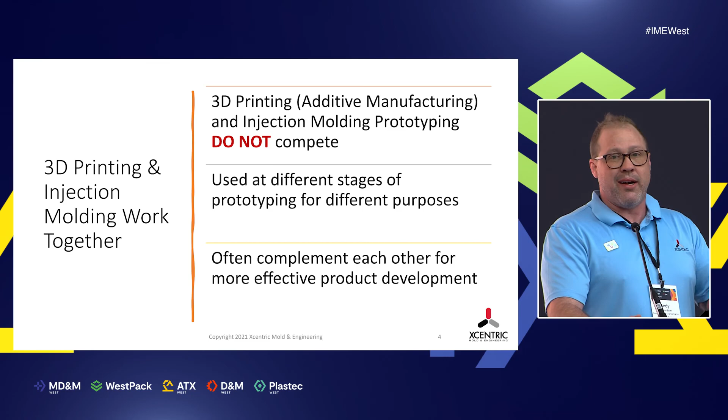So additive manufacturing, or 3D printing, as it's oftentimes called, and injection molding are not competitive technologies. They both serve the prototyping element of your product development cycle very effectively and complement each other quite well. They're definitely used at different stages of the process, though, so we're going to dig in a little bit more on that and take a look at how they complement each other really well.

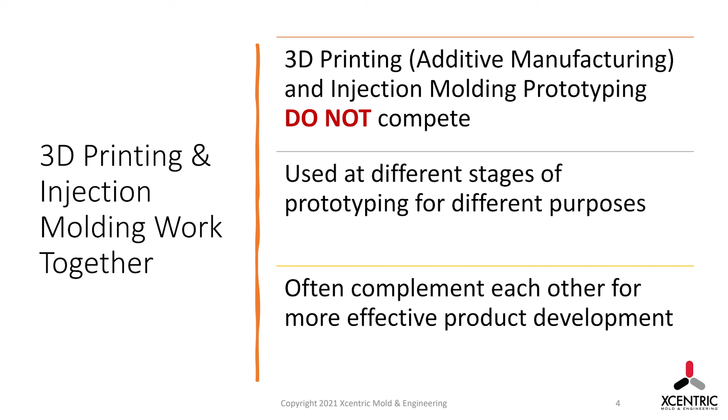So to start with, some of the advantages and disadvantages of each type of technology. So 3D printing, or additive manufacturing, is great for quick iterations. You can have a part built in as fast as a day, get it to you in 2 days, and you can do a lot of iterative design process to really iron out what you want your fit and form to look like for that specific part.

You have relatively low upfront costs. You don't have any capital equipment or assets that you have to purchase like you do with injection molding. There's not a tool there. You can basically just submit a CAD design, print it really quickly, get part in hand in a couple of days. So they're great for fit, form, and even some functional testing, but there are some limitations there that we'll talk about in a minute.

With additive manufacturing, it's great if you have very complex designs that don't really have a way to be manufactured using traditional technologies such as injection molding or CNC machining. So even for production environments, if you have really complex designs, there is an opportunity to be able to use 3D printing for that as well.

Some of the challenges with 3D printing is it's typically a lower fidelity manufacturing process than what you see with injection molding or CNC machining. There are a tremendous number of materials that are available now from a lot of different vendors, but there are still some limitations in terms of the materials that you're going to get and the functionality of those materials. They're not necessarily going to replicate specifically what you're going to see with a traditional thermoplastic like you would see with injection molding.

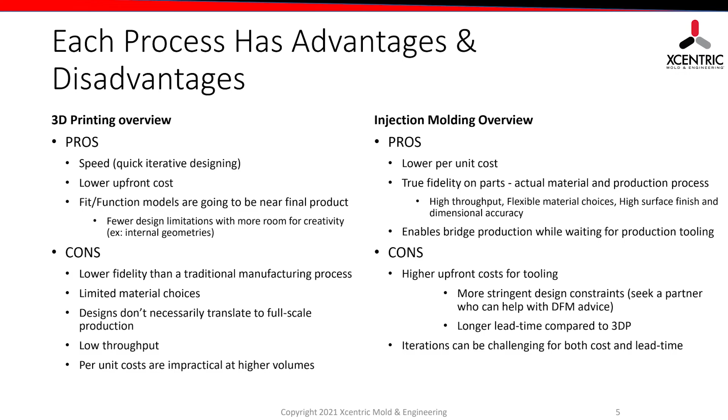There are obviously some cons to using aluminum tools for prototyping. You do have the cost of making the tool, whereas with an additive manufactured part, you can print it and have the part in a day for a couple hundred dollars, but with a tool, obviously, it's going to be a little bit more expensive on the front end. So you do have to keep that in mind as you're going through the design process. And we're going to talk about how these two technologies can marry together to serve everything that you need in the product development cycle to make it as cost effective and as efficient as possible.

One of the things I do want to caution you about with injection molding specifically is that before you get to a place of making a tool, make sure that you're partnering with somebody that can actually provide you with design for manufacturability feedback on your design before you start cutting steel or aluminum. It's really important that you start early in the process, so you're having those conversations even before you're prototyping, so you know exactly what to expect in a manufacturing environment.

Because what happens is with a tool, especially if you have a design where you need to remove plastic, it can end up being really costly and time consuming because you either have to recut the tool or weld it up and recut those specific features. So just make sure that you're working with somebody that's going to be able to support you through the entire product development cycle on the front end.

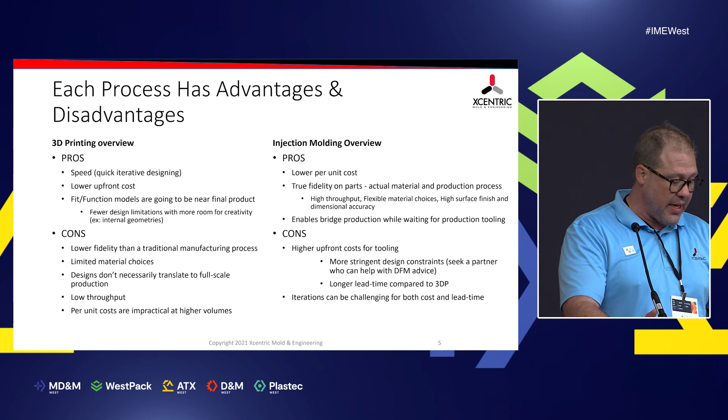So taking a closer look at 3D printing specifically, usually this is going to be used for evaluating the feasibility of the design that you're working on, looking at the appearance or the feel of the actual CAD data that you've been working on. So again, great for fit and form, some functional testing. It's not going to give you the actual in-use material that you're going to use in production. So typically, the material properties shouldn't be a high priority at this stage unless you have some very specific testing that you need to do, which is when you'd want to consider other technologies to produce the parts.

Typically, again, volumes are always a consideration with additive manufacturing. From a cost per unit perspective, the more parts that you need to build, there's usually a transition point where it makes a lot more sense to go with a traditional manufacturing technology such as injection molding versus doing prints, just because the average unit cost is going to be a lot higher.

There are a tremendous number of printers that are available, both commercial and industrial. As you walk around the show, I'm sure you've seen plenty of the printers that are out on the floor out here. Relatively low-cost printers are available. There are some challenges that we'll talk about in a second with building the additive manufactured parts yourself that you have to keep in mind.

And another often used element for 3D printing that I mentioned earlier as well is if you have a design that just can't be manufactured in any other way, or if you have custom manufactured parts that are individual on a case-by-case basis. So a good example would be hearing aids.

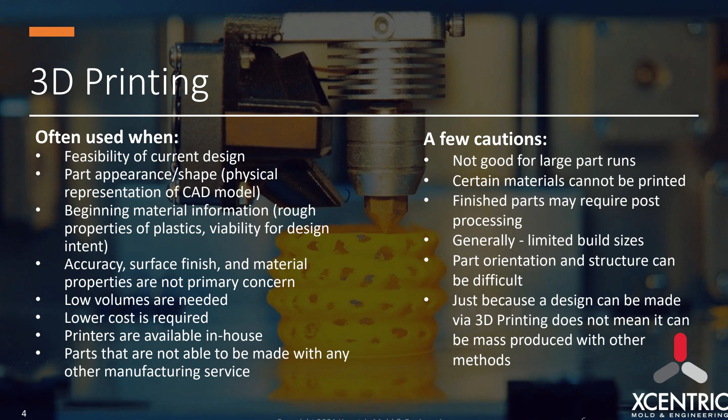So hearing aids are typically going to be molded to an individual's ear. So you're not going to make a tool and have a standard size shape that you're using for hearing aids, or even dental applications such as Invisalign. I know they use stereolithography for all of their molds that they're using to create the thermoform parts. So that's a great example where 3D printing can actually be used in a production environment and create a lot of value for a customer, because you don't have to build traditionally manufactured tools or parts for those custom applications.

There are some things to be considered that you want to be cautious of when you are using 3D printing, though. Again, it's not great for large part runs. If you're making 500 or something, there are a lot more cost-effective options that you have available to you.

There are certain materials that can't be printed. Again, hundreds of materials on the market are available across dozens of different technologies, but they're not going to be the exact same thermoplastics that you're going to get in an injection molding application. So you can get something that's ABS-like or nylon, or even some nylon-based materials in powder bed technologies, but it's not going to function or act the same as molding a nylon part as you would in an injection mold. So it's a lot different, and you have to be considerate of that.

Generally, you are limited to build sizes. There are some industrial printers that have really, really large platforms, so you can make a part that's a couple of feet long or a few feet long, but generally speaking, you are still limited to that platform size. So if you need to make 5 of that really, really large part, you're going to be running that build 5 times, and it's going to get very expensive.

And additionally, when you're using additive manufacturing in your product development cycle, again, just because it can be printed doesn't mean that it can be manufactured with a traditional process. So make sure that you guys are partnering with somebody that can help you with that design for manufacturability feedback early on in the process before you start prototyping, and you're going to have a much better chance for success with that.

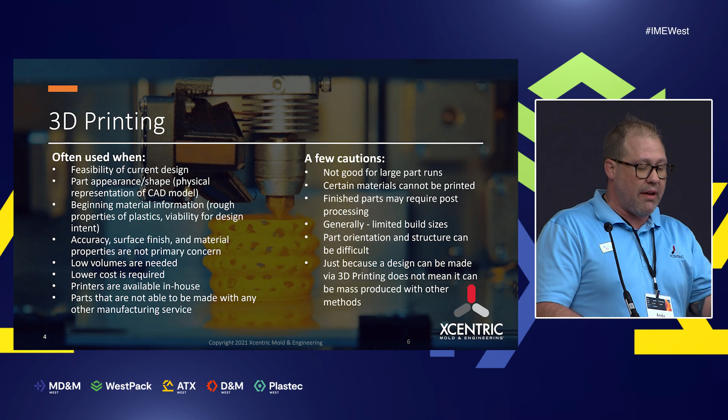So I mentioned that there were dozens of different technologies out here. Today we're just going to take a closer look at 2 of probably the most common technologies, which is FDM and SLA, or fused deposition modeling and stereolithography apparatus. So FDMs are typically quick and dirty prints. They're very easy. There are dozens of printers out there that you could probably buy for a couple thousand dollars that would allow you to use this technology and print on your desktop at home out of an actual thermoplastic.

So the way that I like to describe the process itself is you basically have an extrusion nozzle that's laying down a thin filament of this material over and over, line by line, layer by layer. So if you could imagine looking at a spool of fishing line, that's kind of what the part's going to look like when you get done.

So as you can imagine, there are some limitations with this process. If you imagine creating a snap feature that's in the vertical direction of the build and you try to apply stress to that, it's likely going to delaminate, so it's not going to function exactly the way that you need it to. So there are some cautions here, and you want to make sure that you're working with somebody that has the experience to make sure your part's built and oriented in the machine to print it appropriately.

The process itself for FDM is typically a lot faster than SLA. Not necessarily the build itself, but with SLA, you have a lot of post-processing that you have to do. You have to wash the parts, clear the supports, and cure the parts again. And then there's additional finishing if you want a nice clean surface finish on it as well. So typically with FDM, you build the part, break away or wash off the supports, and you have your finished part. With stereolithography, even though it does require some additional finishing after the part's done, you can get really good dimensional accuracy and surface quality in the part.

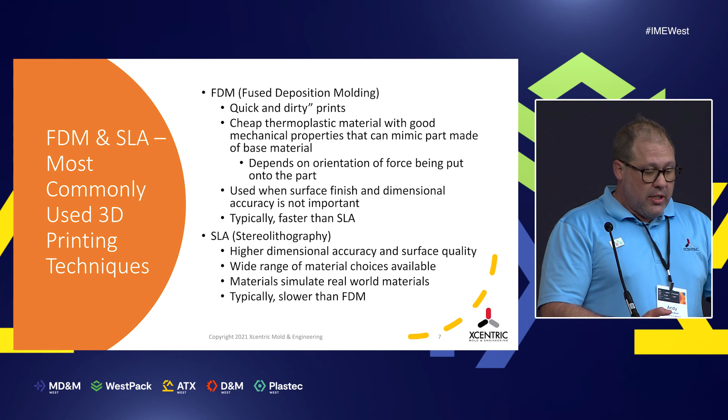So with injection molding specifically, often what we're doing with this technology is we're going to be using this for more complex parts. There's a lot of opportunity here for insert molding and overmolding, which there are some technologies you can use for 3D printing to simulate those, but it doesn't give you the same real world applications that you get when you're actually molding these features in or doing a true second shot molding process.

If your parts need high dimensional accuracy, or if you have specific testing that you need to do on the material or drop testing or anything like that, typically you're going to look at using an aluminum tool to do prototypes out of the end material that you're going to be using, because that's really the only way that you're going to actually get an in-use part to be able to do those tests.

Or if you're just doing some evaluation of what the part's going to look like, you want to look at shrink and warp and splay or aesthetics, like what the part's going to look like when it comes out of the mold. You obviously have to go with a process that's going to be very similar to what you're going to be using in a production environment.

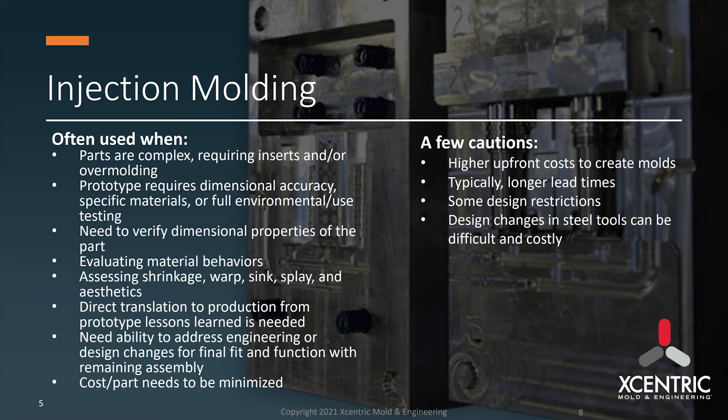Or if you know that you have to run a large number of samples of the part for whatever application. So if you need 500 parts, typically making an aluminum tool for your prototype is going to be a lot less expensive than printing 500 parts, even if you don't need to do any of the testing that we talked about before. But with that, there are some cautions that you need to keep in mind.

So obviously, you're going to have much higher upfront costs because you have to cut the tool before you can start running parts. Typically, it's a little bit longer than rapid prototyping. With rapid prototyping, obviously, you can get parts in a day or 2 days. Tooling, the fastest tools that we typically do are about 5 business days. So it's not a tremendously long time, but you do have to make sure you're taking that into consideration in your product development cycle.

And there are obviously some design restrictions that you have here. So you have to have draft on all your features. There are certain undercuts that you can't accomplish in an injection mold tool or become very cost prohibitive, if you're talking about having to use hydraulics for certain cores or unscrewing cores and that sort of thing. So certainly things that you want to keep in mind as you're going through the design process.

And also, if you get into a tool and you have to make changes to the design, it can be expensive. As I mentioned earlier, if you're taking plastic away, there's not going to be a steel safe change. So you're going to have to add metal back to the tool, which either requires welding or recutting a new tool depending on the specific design changes that you're making. So that's going to add a lot of time and cost to your process up front.

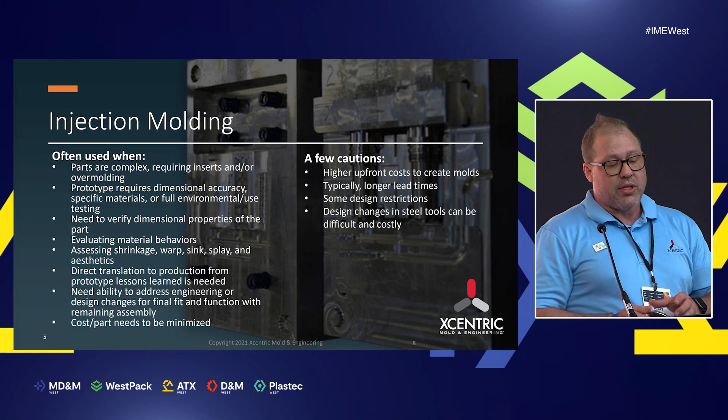So what we see is that most customers are using a combination of both of these technologies together. The way that we're defining success for them is we're looking at total design process time, design process certainty, and time to market, which are all very important parts of the product development cycle. So oftentimes what we see customers using FDM for, again, very quick, you can iterate quickly, you can even buy a printer where you can do it at your desktop in a matter of a couple of hours. So it's great for your initial concept, maybe the look and feel of the design, maybe even some functional testing, depending on the features that you have built into the design as well.

If you want more of a higher fidelity part, better surface finish, better finishing options, SLA tends to be a little bit better than what we see with FDM. And also with SLA, you have a much, much wider range of different materials that are available. The difference being that FDM is using an actual thermoplastic, whereas with stereolithography, it's a simulated material to that thermoplastic that you're looking for.

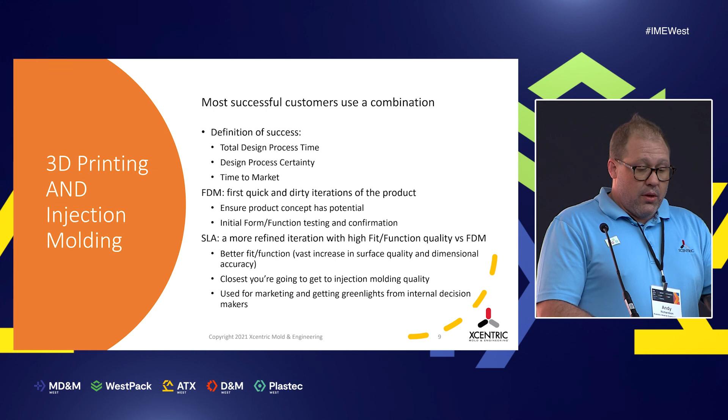What we specialize in at Xcentric is prototype and low volume injection molds. Typically we're using QC10 aluminum. We can do P20 steel as well, but usually this is great for when we have customers coming to us for the prototype element of their process. Usually this is for fit, form, functional testing, where they have to use the end product material in their testing environment. So this is a great opportunity and we can do it relatively quickly for them.

And additionally, this is a great bridge tool opportunity if you are moving into a high volume Class 101 mold that's going to take you months to produce. You can use an aluminum tool, get your actual end use material relatively quickly, as fast as 5 days, and be able to use that to bridge the gap while you're waiting on your production tools to be completed.

Production tooling, typically this is going to be Class 104, 103, 102, and 101 molds. So usually you're looking at steel, P20 steel or harder, up to stainless steel in some instances, and some coatings that you can have. So this is great if you know that you need to run millions of parts a year; typically you're going to be looking at a hardened steel production tool or potentially multi-cavities.

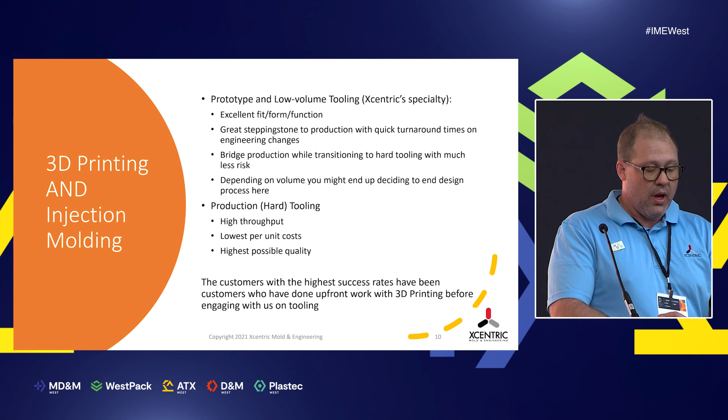And we often work with customers at Xcentric where we are, again, bridging the technology to help support them while they're working on those specific tools that take months to produce, using a prototype or low volume aluminum tool. So now taking a look at a couple of instances where we've worked with customers to use both of these technologies to help them accelerate their product development cycle.

So the first one, a customer had an idea that he wanted to present to his marketing team and his board for approval. And then after he got approval from his marketing team and board, he wanted to do some testing; he was doing drop testing in this specific instance. So he needed the actual thermoplastic that he was going to be using in production. And eventually it was going to be about a 50,000 shot per year program.

So what we did for him specifically is we used an SLA to get that in front of his board and his marketing team so that could be socialized and approved before we transitioned to a single cavity aluminum injection mold. Because he needed to do the drop testing, we had to use the mold for the samples that we ran. We gave him 25 samples of the part, and ultimately after that got approved and passed all the testing, we were able to transition to his full production using that aluminum tool, and it was able to run for multiple years without any issues.

So basically, why did we choose those technologies? Again, 3D printing, the SLA was a great opportunity to give a high fidelity, good surface finish part that he could get in front of his board. He could get the approval that he needed before we transitioned into the injection molding to serve both the prototyping and the production that they needed for that program specifically.

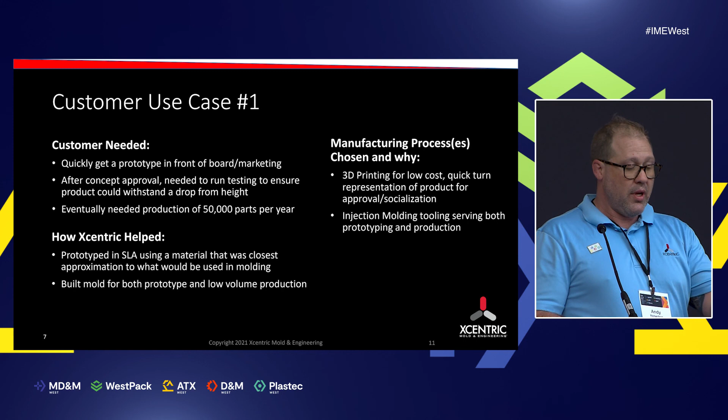The second case that I'm going to talk about is very similar, but there are some slight variances here. So again, he needed something to get in front of his marketing team and the board to get approval on the program itself from the design and the concept that he had. And eventually they were going to be ramping to 10,000 parts per year. They knew that they were going to have a lot of design changes coming up through the process as well because of the industry that they were in.

So what we did is we actually used the SLA for the socialization and the approval with his board and his marketing team. And then we created a prototype tool with the anticipation that we were going to have to make some changes to that tool.

So we made it steel safe around those features so that instead of having to remove plastic from the part, we were able to add plastic to the part to really get it dialed in to what they were looking for specifically. And so we were able to make very small, easy changes to the tool, relatively low cost, relatively fast timing, comparative to having to build the tool from scratch.

So again, the 3D printing was a low-cost opportunity to be able to socialize the ideas and the concept with his board and his marketing team, and the tool allowed us to go through the iterations that we knew that we were going to have to go through with this customer.

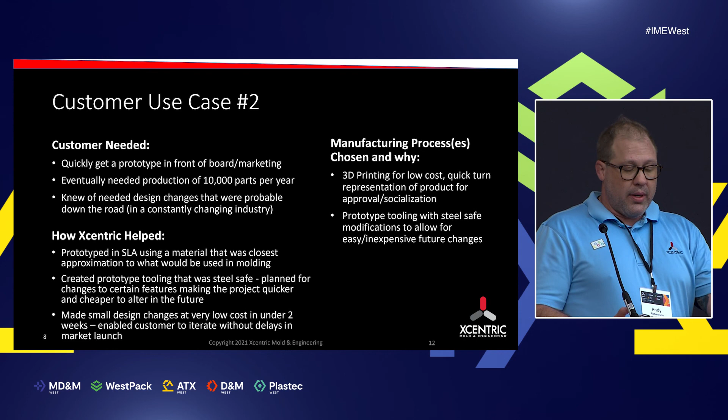And the last one I want to take a look at today is a customer that had already done their own prototyping in-house, and so they had already gotten the approval for the program. And their initial volumes were going to be really, really low. It was only going to be 50 parts for the first year, and that was going to ramp to about 25,000 parts per year after that.

The challenge that they had, because the volume is really low, additive manufacturing or casting may have been a really good option for that, but the environment that the parts were going to operate in was outside. It was going to be in a really rugged environment, so it needed to have a UV inhibitor added to it, and it needed to be out of an actual thermoplastic that was going to handle the rugged environment that they were in.

So what we ended up doing for this customer was, since they had already done the rapid prototyping themselves, we cut an aluminum tool so they could do the testing in the initial year, 50 parts that they needed, and then they were able to maintain that tool after everything was validated to be able to transition to their full level of production with 25,000 parts a year.

So really here, because of the material requirements, the only solution that was available for them was going to be injection molding, and we were able to do this in relatively short order to be able to accommodate all of their prototyping and production needs.

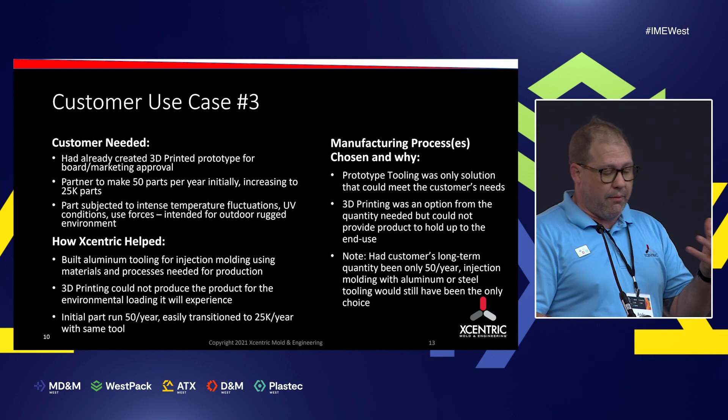So what are the decision criteria that we have for your project? There are a few things that you want to keep in mind here too. You want to consider your immediate, your mid-range, and your long-term goals for the project. So what are your budgets? What are your budgetary requirements for each of those different stages? How fast do you need to get parts in hand?

What are you going to be using the parts for? Is it going to be for demonstration? Is it going to be testing? Are there going to be expected or even potentially unexpected design changes that may come up in the process? What materials do you need to make the parts out of? And then what are your volumes going to look like for each of those different stages?

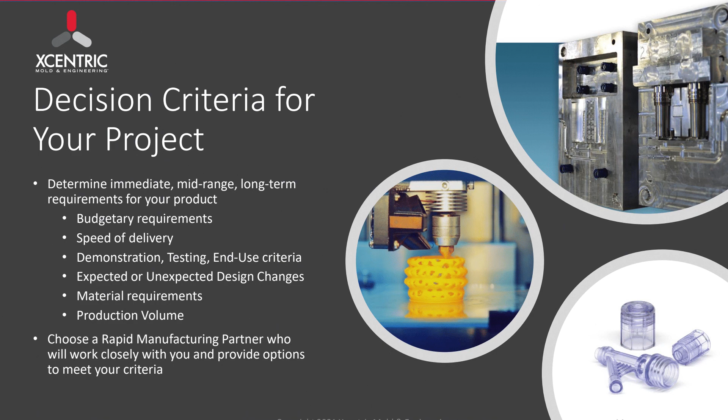So I encourage you all to work with a manufacturing partner that can basically walk you through that entire process, provide the design for manufacturability advice that you need at the very front end of the process, and then support you through whether you're going to a full-blown production tool or not, be able to support you through each of the different stages, both immediate, mid-range, and long-term objectives that you have.